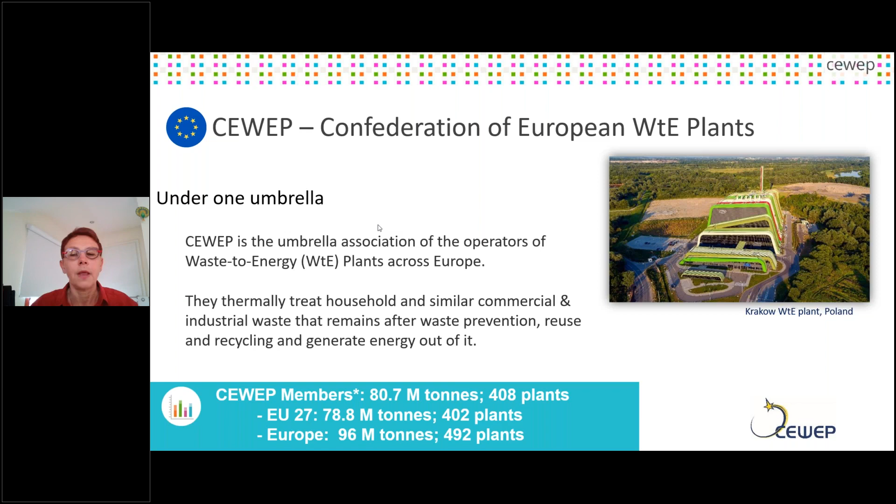ESWET is the Suppliers Association. They provide the technology and foster the development and dissemination of waste-to-energy technology. ESWET has 28 members, including the main global players among the technology suppliers of the waste-to-energy sector.

I will give you a very brief overview about waste-to-energy, what it is about, for those who might not be familiar with it. Waste-to-energy has a double role in sustainable waste management, hence the circular economy, as well as in energy production. On the left side, you see the circular economy in the waste world. Waste-to-energy can contribute to sustainable waste management by diverting waste from landfills, following the waste hierarchy at the bottom. So the waste that can be turned into energy does not have to be put on landfills.

It helps quality recycling because it takes the residues from waste sorting and recycling facilities. The rejects, which are not good enough for quality recycling, can still be turned into energy by waste-to-energy plants. Last but not least, the main task of waste-to-energy plants is a hygienic one: dealing with the pollutants embedded in the waste and avoiding that they are spread in the circle.

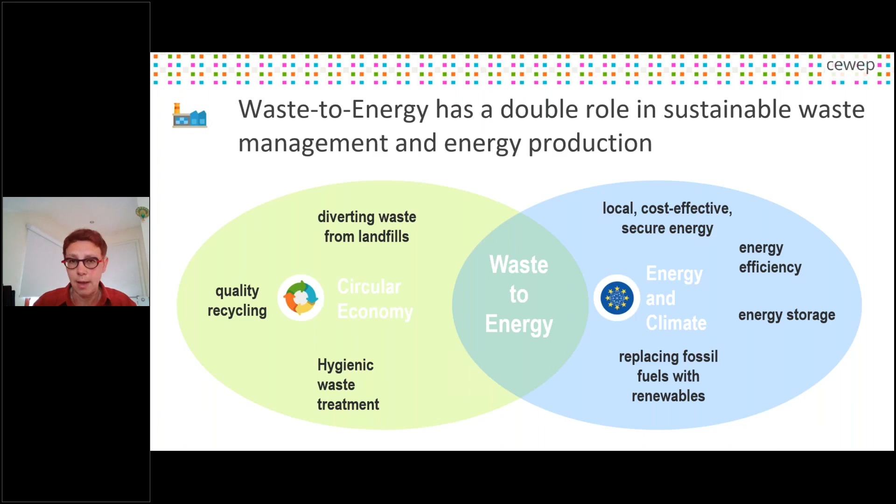Waste-to-energy plants are decentralized plants. They provide local and cost-effective energy, and they provide security of energy supply because they are base load, operating 24 hours a day, 7 days a week, providing a reliable source of energy on the local level. The operators are looking more and more into energy efficiency, and another aspect we will discuss today is energy storage with respect to hydrogen production. We will come to that later. Next slide, please.

This shows the scheme of a waste-to-energy plant, how it works. On the left side, you see the waste delivery, the bunker. Then the orange part, that's the thermal treatment and the energy generation. And the part in blue, that's the flue gas cleaning. This is a huge part of the waste-to-energy plant, and this part guarantees the low emissions of a waste-to-energy plant.

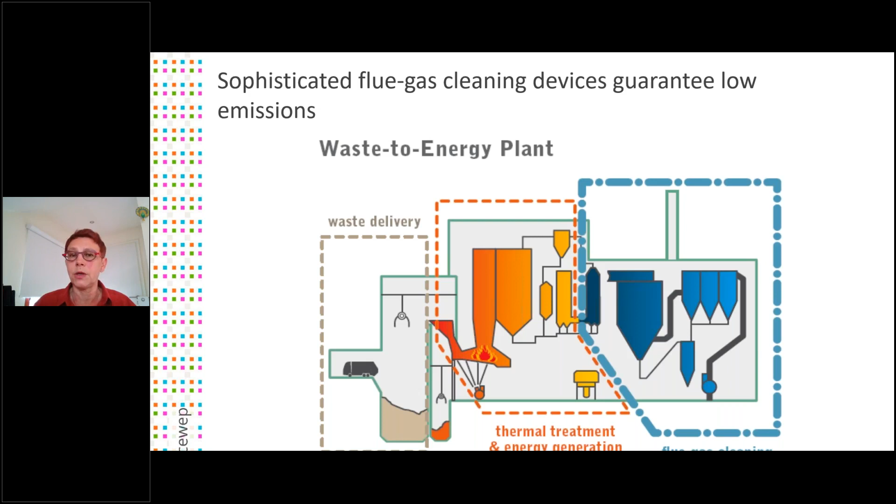When I say low emissions, I refer this time not to greenhouse gas emissions, but to pollutants like heavy metals and dioxins. So this quite complex flue gas cleaning system is responsible for achieving very low emissions. The waste-to-energy sector is covered by the most strict monitoring and emission levels, which it complies with. That has been even updated in 2019 with the best available technology on waste incineration being updated. Next slide, please.

So to summarize, waste to energy helps to save millions of tons of greenhouse gas emissions. How does it do it? First of all, as I mentioned, it diverts waste from landfills, which emit methane. This is a very potent greenhouse gas. So the waste that is not put on landfills, but is instead treated in waste-to-energy plants, doesn't produce methane.

Then waste to energy recovers metals and minerals from the bottom ash, which is the leftover after the incineration process. This also saves CO2 emissions. For example, aluminium can be recycled from the bottom ash and doesn't need virgin materials. And last but not least, waste to energy substitutes fossil fuels in energy production. About half of the waste treated in waste-to-energy plants is of biodegradable origin, and therefore the energy produced from this waste is renewable.

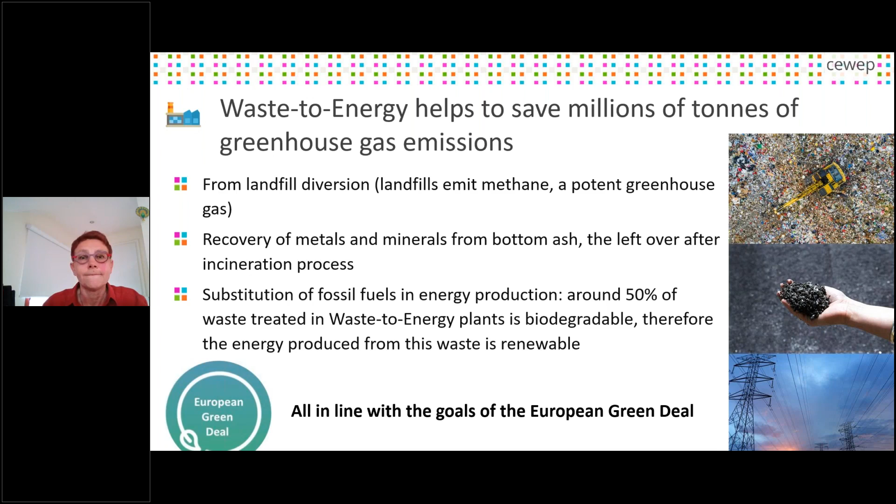All this is in line with the goals of the European Green Deal, and we feel very much at home in the circular economy and the Green Deal. Next slide, please. And that's my last one.

So that brings me to the topic today. The waste-to-energy sector is looking into innovation. And when it comes to climate mitigation, that is apart from carbon capture and use, and if use is not possible, storage of carbon, but it also looks into sector coupling. There's a huge potential for synergies between waste to energy and hydrogen production. Waste to energy can rely on the programmability and also flexibility of the energy production, and this enables energy storage with hydrogen production through an electrolyzer.

We will hear more about it later on. Hydrogen projects are on the way in Europe, and they contribute to the production of green hydrogen through the electricity which is produced from the renewable fraction of the waste. This helps to decarbonize heavy transport, the tricky-to-decarbonize sectors like buses or waste trucks. It replaces the use of diesel, for instance.

And it is important to produce hydrogen from residual waste treatment. This is recognized by the Environment Committee of the European Parliament in the European Strategy for Hydrogen. So what we need is a clear hydrogen classification system, and a reliable regulatory framework is necessary in order to provide investment. We will see today from Wuppertal, which is a good case, how they invested in order to produce hydrogen from waste to energy.

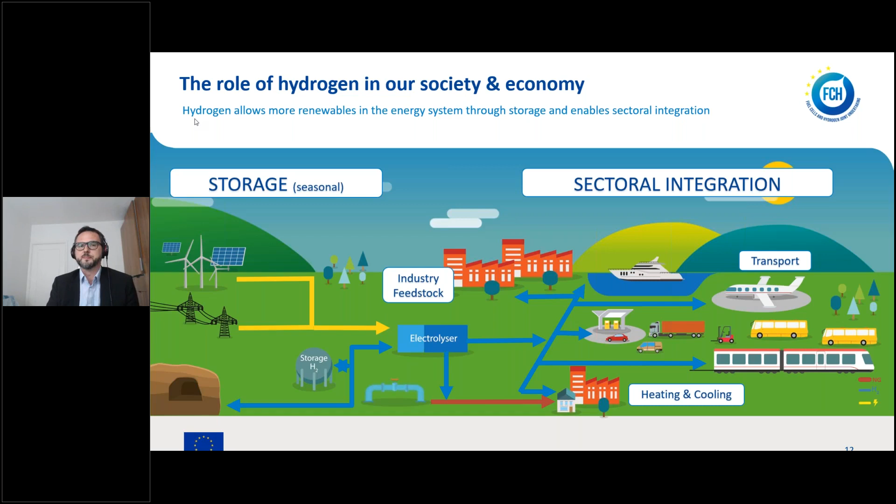Next slide, please. I just wanted to give you a quick overview of the technology, the achievements, what we have achieved so far, and what you can expect in the future. This will help give us the framework for this waste-to-wheel concept.

Still less than a decade ago, when looking at the electrolyzer, the capacity was well below 1 megawatt, and the public support we had to provide to make this technology and business cases fly was quite considerable. However, keeping aside a lot of details and evolutions and projects, we arrive at where we are today. Only in September of last year, there was the Green Deal call, which is calling for the development and deployment of a 100 megawatt electrolyzer. So just using this KPI, this key performance indicator, looking at the capacities of what the electrolyzer can do, it already gives you a good idea of how the technology has evolved and what we can expect for the future.

Now, much remains to be done, of course. We are not quite there yet in terms of costs, performance, and so on. However, you could say that at least from a technical point of view, we are on the right trajectory to contribute to and realize the hydrogen strategy goal, which is to have 40 gigawatts of electrolyzer installed in Europe by 2030 using renewable electricity.

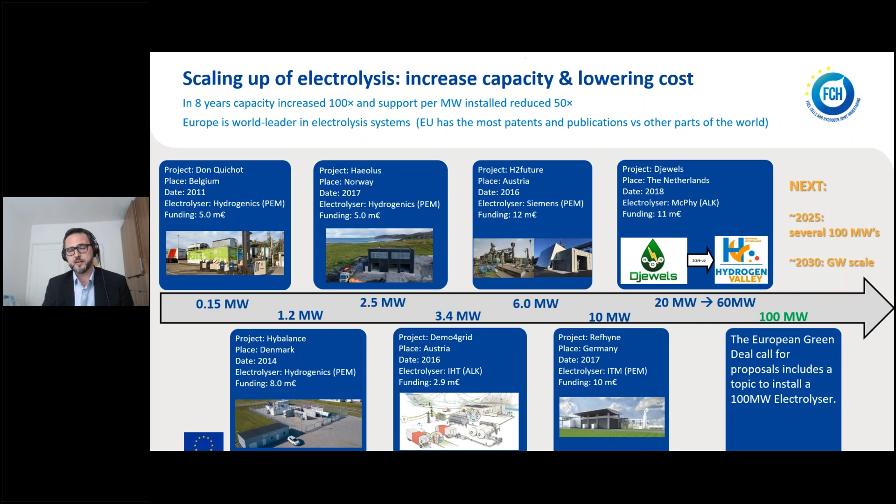What does it mean? Well, in real life, it means that in the past we had projects and commercial applications which were limited to light-duty vehicles, private cars, material handling vehicles, or buses - all transport applications that either didn't require a lot of hydrogen or didn't require a lot of power.

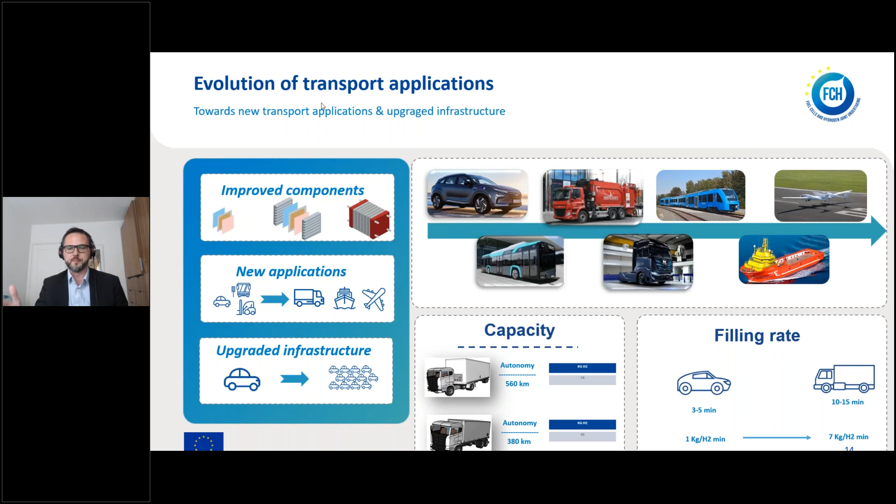What this project intends to do is to validate the use of fuel cell trucks for the collection of urban waste. We will deploy 15 trucks in 9 different cities across 4 countries. These trucks will be operated in real life conditions, so no special treatment for them. They will be operated by waste collector operators that will test these trucks against what they are using now, the incumbent technology, which is diesel.

So if you wish, it's an important project, but it's a classical project in the sense that really the idea here is to deploy the technology and to test, to see, to monitor it and collect the data to see where we still need to do the research and to see also where things are already working fine.

If we can move to the next slide now, there is an additional interesting component in this project, which is the waste-to-wheel study. So in addition to testing the vehicles, the consortium, which involves OEMs, cities, and waste operators, will also carry on a study which has the scope to...

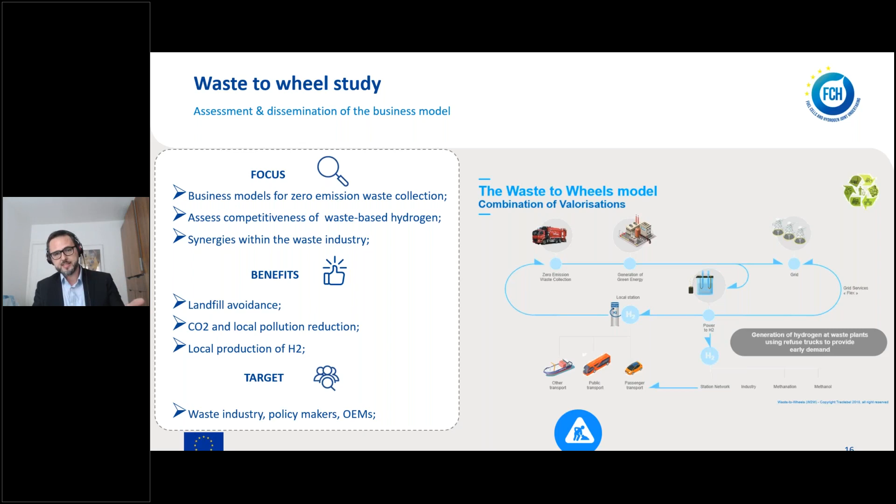And with my next slide, I would like to conclude this general overview by also highlighting the fact that Revive is not the only European project dealing with this topic. There are two additional projects mentioned here, Life N'Grab Hy and Hector.

And these three projects have also signed an agreement that will allow them to cooperate, not only to raise awareness about these business models, but also to gather and discuss together their respective experiences, so that they can come out with a coordinated set of policy recommendations that will help the waste-to-wheel concept to emerge strong in Europe.

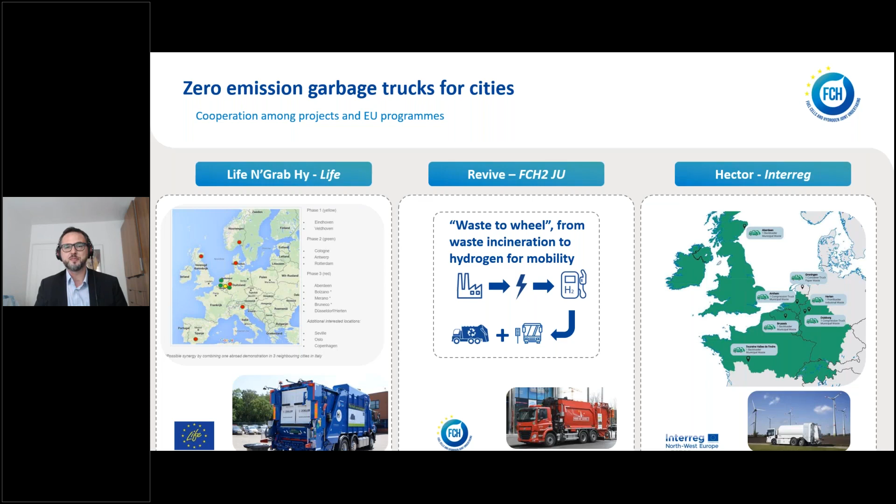So I'm afraid the time is up for me, and this is all I wanted to share with you. I'm looking forward to the discussion that we will have later. Thank you for your attention.

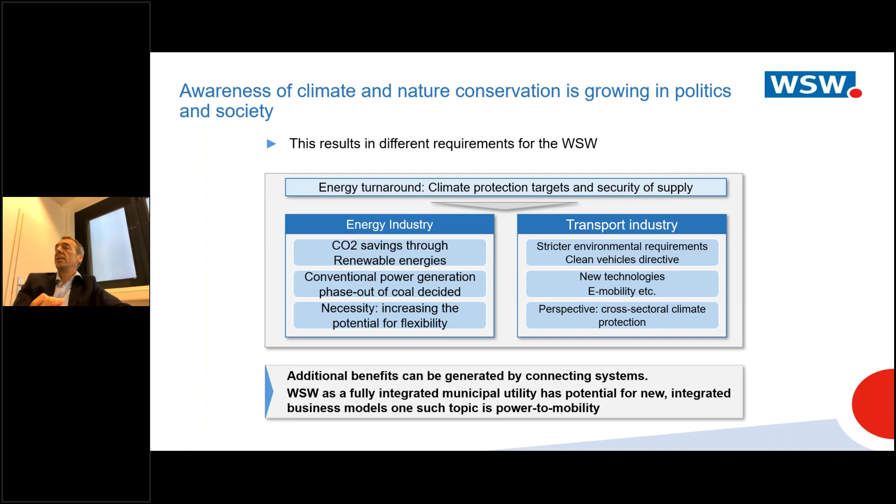When we started to think about electric vehicles, we looked at both possibilities: batteries on one hand, fuel cells on the other. Wuppertal is a mid-size city in Germany, but it's a very hilly area, and they forgot to build passes over the hills or turnarounds, so it's very difficult with steep uphill gradients. We calculated that we need 1.7 kilowatt hours per kilometer in our topography, which requires a large battery to achieve the operating ranges if we look at batteries.

With reduced storage in batteries, it's clear that wasn't the right solution for Wuppertal. So we looked at hydrogen fuel cells, and there we identified the flexibility I talked about before - we need this in storage. We get better or the same performance for operations compared with diesel buses, and fast refueling close to 10 minutes for these bus vehicles, which have a high volume tank of 35 kilograms per bus. Fast refueling was important to us because we wanted to keep our operation schedules unchanged, so it was a big advantage to use fuel cells, and we decided to bring electric vehicles in this form onto the streets.

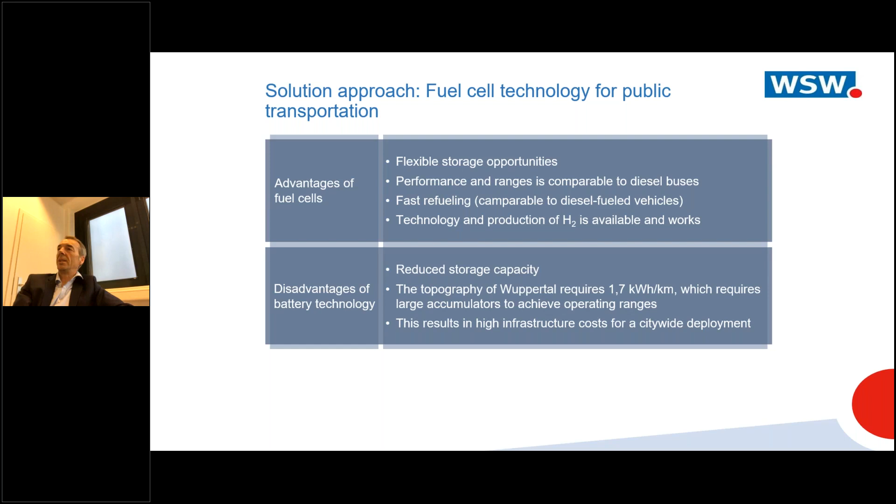We checked a lot of things. One important point is that we have an economic project, so we had to check the costs of hydrogen on the market. At the time we decided to make a fully integrated project in our company, the price of hydrogen was too high on the market for us. So the decision was made to produce it on-site in our company to reduce overall costs.

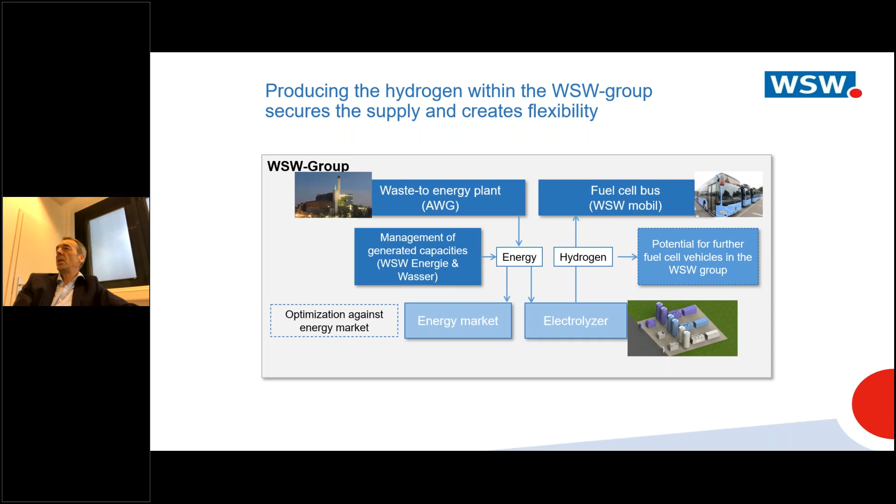We use our waste-to-energy plant, where we produce energy and heat, and use that energy either on the spot market or for the electrolyzer. This is managed by our energy and water company, which monitors energy prices to find cheaper periods to use for the electrolyzer. From there it goes to storage, to the hydrogen refueling station, to the bus, to the wheel - so we have a continuous process from energy production all the way to the wheels of the buses.

Our waste-to-energy plant is still operating here. We have 5 boilers in operation at the moment. Depending on the waste supply and the waste chain, we currently use 3 to 4 boilers.

From these boilers, we have two turbines where we produce power, and on the other hand we use it for the CHP, steam, and water heating for our city. But for us, it's interesting that we send the power to the spot market, or here to the hydrogen production.

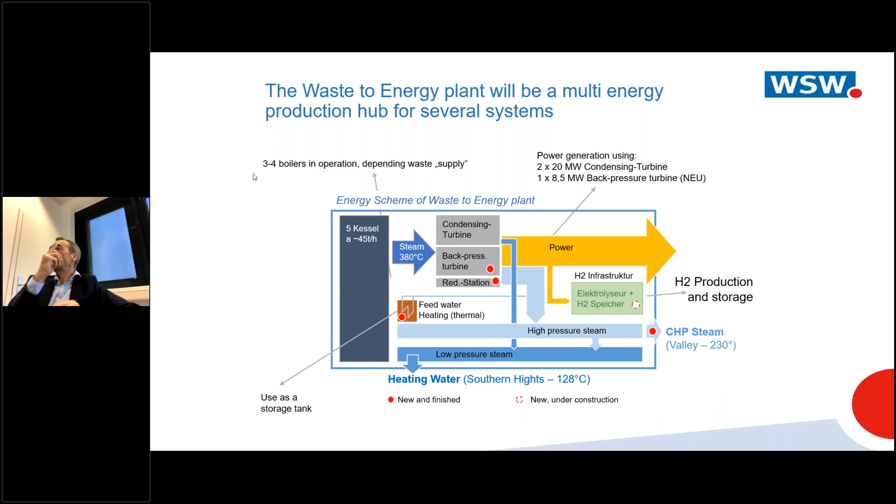In a short overview, we have energy generation with 50% renewables in the waste. So we have 50% renewable energy from our plant, and parts of this 50% renewables are used for the electrolyzer, going to the storage and to the bus. With this, we have a 1 megawatt electrolyzer implemented here in this plant, which gives us enough hydrogen in an optimized system to supply approximately 30 buses.

We also have demineralized water in the plant, so we can use this for the electrolyzer. It's an upside that makes it a little bit cheaper. As I mentioned, we have 50% renewables, and while not done now, in the forecast we want to optimize in the near future by using the oxygen and the heat from the electrolyzer process for other purposes.

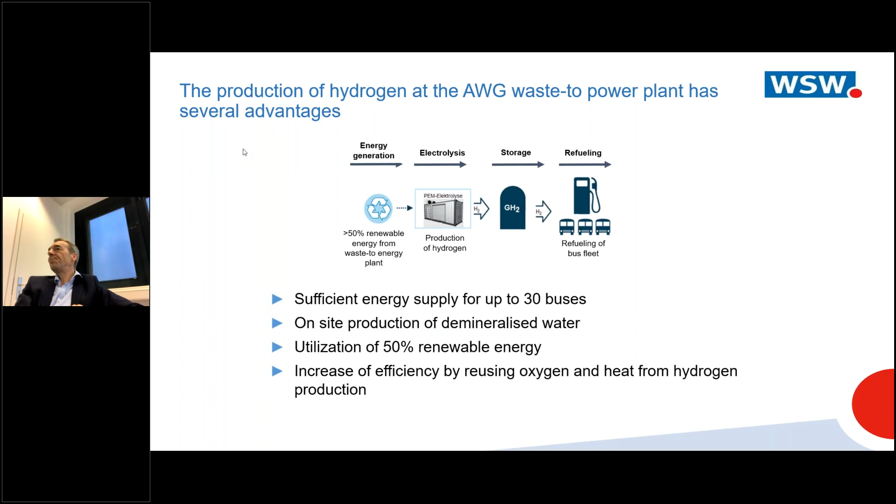That is very important when you want to realize an economic system, because we see that energy prices are growing with more renewables in the net, and this has a significant influence. The decoupling from the electric energy prices for mobility is the most interesting point for us, and it will later show you what effects this has on the hydrogen price and the energy price.

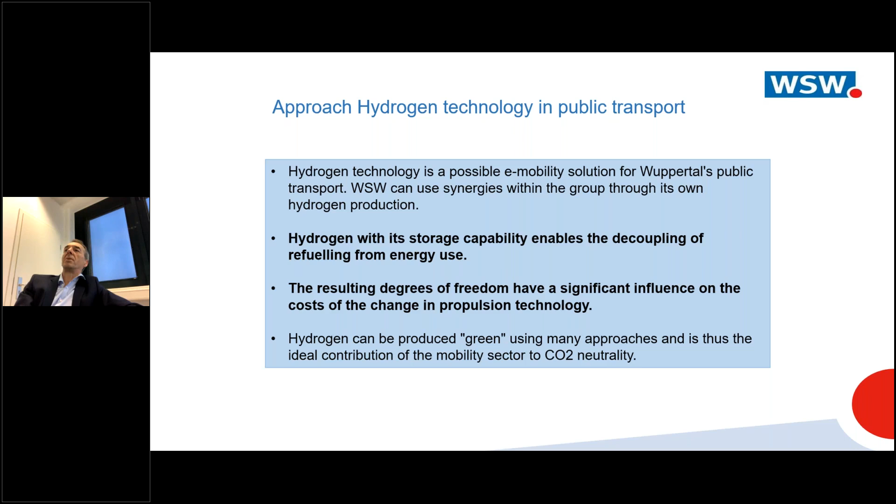And with this knowledge, we can decide the dimension of the electrolyzer, the dimension of the storage, and optimize the system, because at the end of the day the capex dominates the cost of the hydrogen. It's important that we find a good, customized or tailor-made solution to have a really good hydrogen price, nearly matching the diesel cost at the moment.

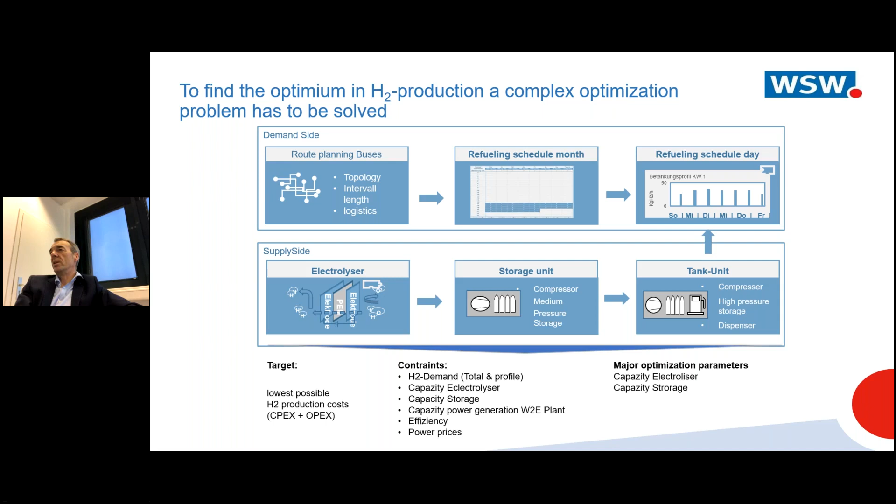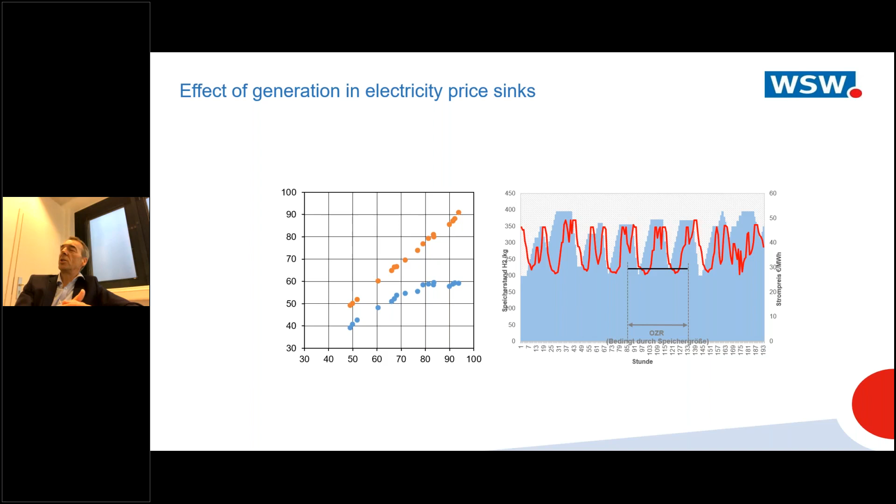So it makes sense to have this calculation before you start, because every time we want to have an economic system that makes sense, not only an environmental vision of this.

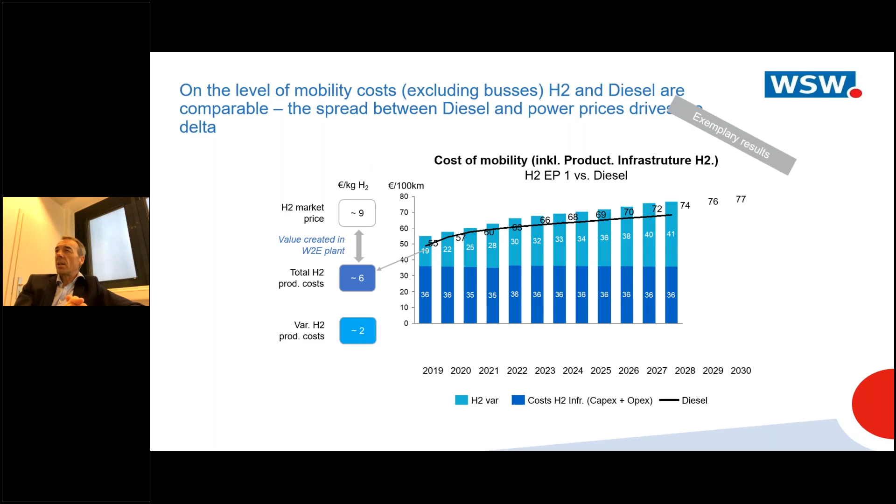Honestly, with this new system we're sure there are some problems, but we can solve all these problems in a natural or normal way. So these vehicles are on the road, and we are happy with them.

In the next slide you see the first waste collector truck, delivered last Saturday, and we are starting operation, I think, in the next days once we've prepared some other things. So at least, yes, a very successful project, showing that it will run with no big problems. It's a standard solution, a blueprint for other companies who want to do the same thing in their areas.

Yes, and that was it from my side. Thank you very much.